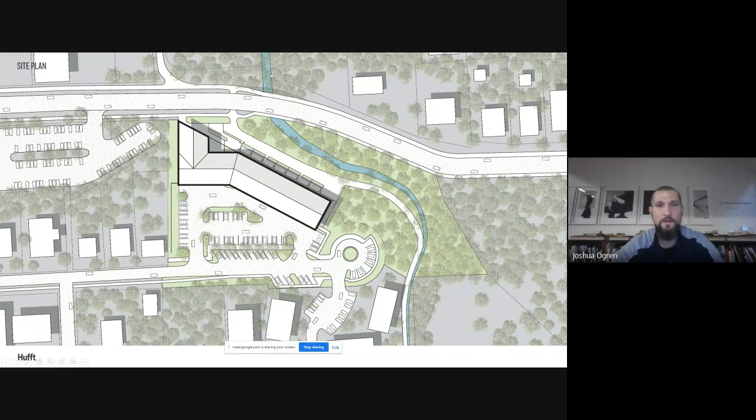So taking our full canvas, mapping some gears on it, dividing those into strips and regions, and starting to get these varied lengths, dimensions and depths with a bunch of wood units that we had to start thinking about - okay, how do we piece this together in our fab shop, and then be able to send it to site in pieces, but for a clean install.

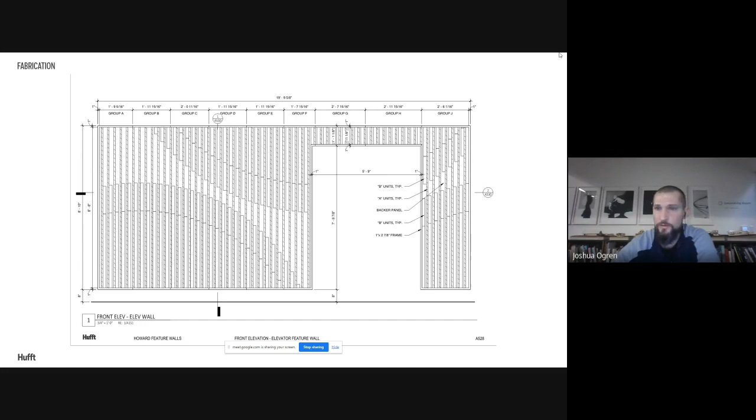Additionally, this allowed our fabricators to easily take a ton of pieces and place them where they needed to go without thinking too hard. So what you're seeing on the back is straight out of the parametric script, programmed to help locate where a bunch of holes would go, essentially to receive the wood units. It looks chaotic, but there's actually an order to all these holes if you look closer, following the gear mapping design on the front.

And then a quick little detail view before I get into images, but something that helped our fabricators guide their process of attaching all these singular units was taking our smaller units and routing a notch into our back panels. Those really led the way for somebody to place a bunch of repetitive units first, and then all of our unique units directly next to those as they worked left to right.

Again, pretty helpful parametric design, allowing us to cleanly and orderly output a bunch of stuff for direct geometry to our CNC router that we have in-house, and keeping those in order for our next step of somebody putting all these pieces together.

So the architects just had this basic idea of this bottom left profile of a long piece of wood, ash. He came to us with one profile that he wanted to repeat essentially along this full canvas, but we thought, no, that's too easy. We could make this a little more exciting.

So we started thinking about how we could slightly manipulate the profile he gave us, really just in height, and then how we would start to arrange these units to fill our nearly 20-foot tall canvas on this wall that we had to fill.

I don't believe there's anything truly random in the world. Even if it looks chaotic, there should be an order to it. So we tried to give order to this random arrangement of essentially wood sticks along this wall.

But what we found was this mathematical term called permutations, which was one way, or one of several ways, to create variation, where one set of numbers can really be transformed to reach your goal.

And we found that just using 3 different lengths, you can see on the left, we would repeat the blue C length twice to reach our full height. But then how could we script something to help us study the random arrangement, while trying to find a goal within that randomness?

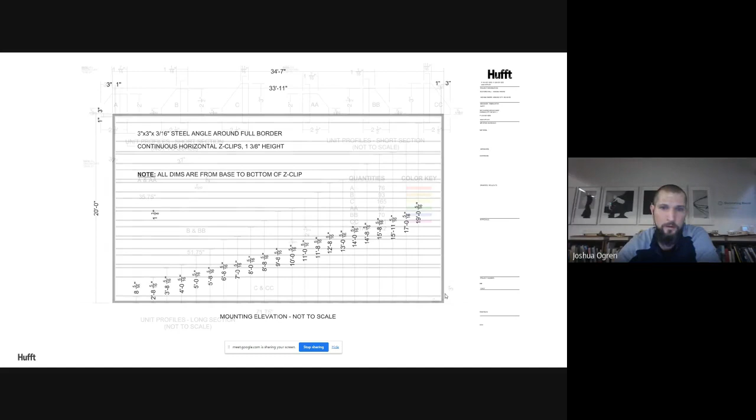So again, using parametric design to quickly output construction documents as they change slightly once you get into fabrication has been super beneficial for our shop. Just another quick drawing of the different profiles, and again, parametric design allowing us to quickly understand how many quantities of each different unit needed to be produced.

So our shop could quickly cut down to scale from ash wood sticks, 76 for A, and then shape them up. So it was a pretty efficient kind of production line we created for it.

This was the final design and kind of a key to help, once we fabricated all these pieces, where each piece would actually go on the wall. Quick detail just showing those back clips that would be attached to each unit, but once they were shipped on site, the construction crew really just had to follow our key and just place these on the wall. There was already somewhere to receive each one.

So we used ash wood for this. It was a slightly lower cost wood, but gave us a nice more white sheen to these, and you can still see grain, which is a nice texture to add to the wall. But again, just almost like Santa's workshop, just pumping out a bunch of similar units. You can see these all stacked before we sent them to finishing.

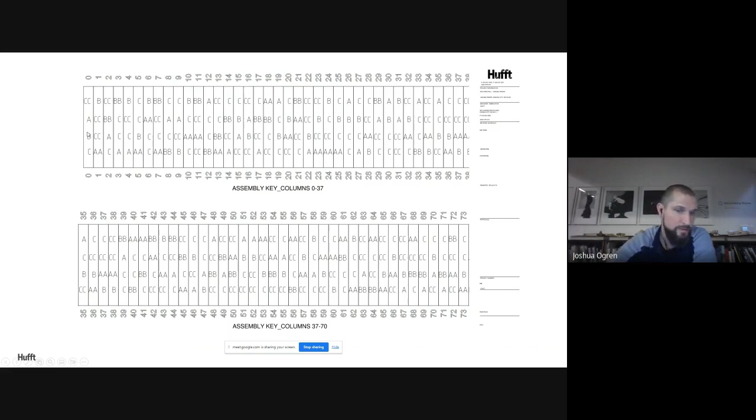And then once they were finished, we shipped them all inside to crates. And although this isn't a pretty drawing, again, parametric design allowing us to quickly produce and output a key so that for each row of these sticks, all the construction crew had to do was go grab that unit and place it on the wall, which was already received by Z clips that were placed correctly.

Next one is a more internal project we did at our office. This was fairly early on when I got hired, and I was the first employee with parametric skills that we could apply. So it did take me a minute to get them to trust the process, and especially with fabrication, the efficiencies that we could do. So this was a nice test for that.

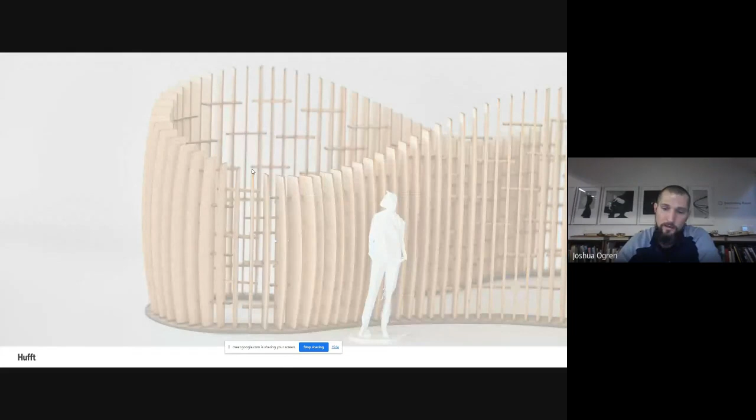So in our office, we had a pretty big empty space, and we're in an old warehouse that we've renovated with the fab shop in it as well, but there's just not a lot of private areas to go to. So thinking of how we could utilize this open space, we had this idea that it would create this kind of mixing of people and energy. And it really brought us to this idea of a nebula, which is the name of it. A nebula is essentially a star that has collapsed on itself and then explodes and creates many more particles around that start to interact with each other, creating a new kind of energy. So conceptually, that formal look at what a nebula is kind of drove what we wanted to do.

These were pretty early pics, but it's evolved a lot since then. We'll see another picture later, but what also made us think of nebula was we had this large sphere that was designed essentially to help plants grow inside. We had that kind of left over from an old project - we might as well use that to be a kind of focal point.

Just going through the kind of process that we went through to see what kind of form we wanted, and measuring kind of material that we could use and afford, since this was an internal project.

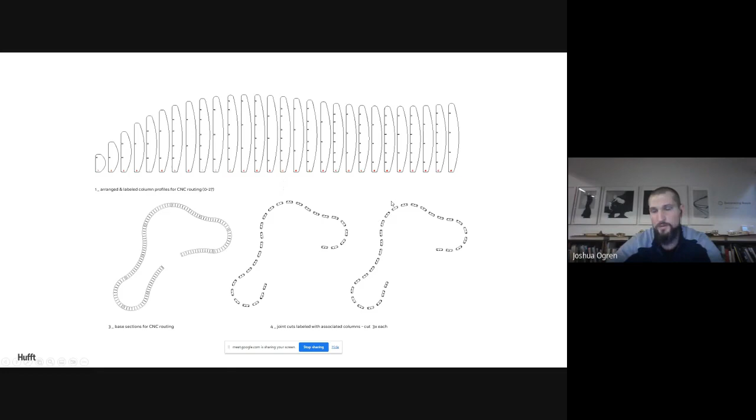On the bottom, this kind of gets to that joint repetition. Although we had maybe 200 joints, we really only had a single, much less cut patterns for each that just needed to be cut 3 times.

So just getting into that kind of fabrication, we did a mock-up of this again to just kind of prove and get everyone comfortable with the whole process that we're trying to implement.

So the mock-up was on our left. We didn't end up using it because we decided to change the top profile of these to be more rounded, just gives it that softer feel. But it went super smoothly. There's no nails in this. It's a freestanding structure with just intersecting wood joints.

Here you can just see the detail of the labeling of all the columns, and then any joint that needed to be attached was also labeled associated to the columns, so they weren't like different numbers or A, B, C with numerical designations.

I should have gotten some final, more recent pictures, but we had tried infilling it to make it a little more private with some small acoustical panels. But now those are gone, and we've infilled this with tons of plants, which really is driven from that grow light being in the center.

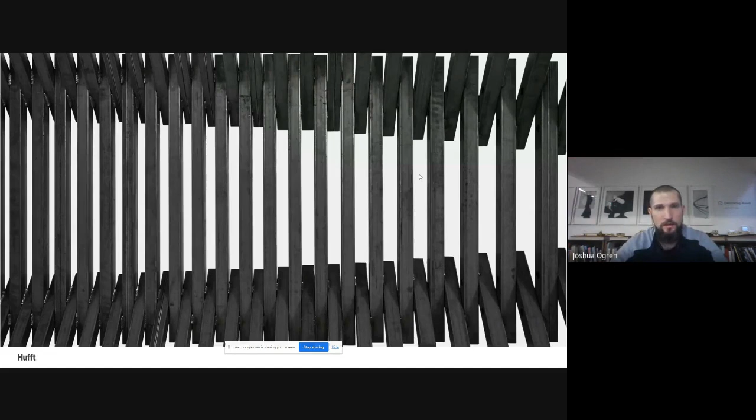Next project, I think we're doing okay on time. Next project were these structures standing out in a National Park in Arkansas called Hobbs State Park.

So we were tasked with 2 different kinds of projects. The one we're looking at here were trailheads for the mountain biking system at the main center of the Hobbs State Park. They wanted these just large structures to kind of welcome people and allow gathering areas before maybe a group of bikers would take off.

There's also, we'll see them in some pictures, some campsite structures that you could hike into. You can't drive to them, you'd have to hike in. So it provides just a nice little element for your evening camping.

But really just showing the breaking down of geometry. It's fairly quick, but honestly pretty simple.

When I started with the project, somebody had designed these on kind of an ellipse rather than a true sphere, which we found pretty problematic for some of the intersections we were looking to get. So we had to take quite a few steps back, apply it to two spheres, and work from there and see what we could come up with.

Again, quick diagrams showing the process of a parametric script, breaking things down and keeping things ordered with each row, knowing that if we're going to have maybe 600 pieces of steel tube that need to be different lengths and different hole intersections, how do we keep them ordered? I really don't know how somebody would do this without scripting and having it parametrically driven.

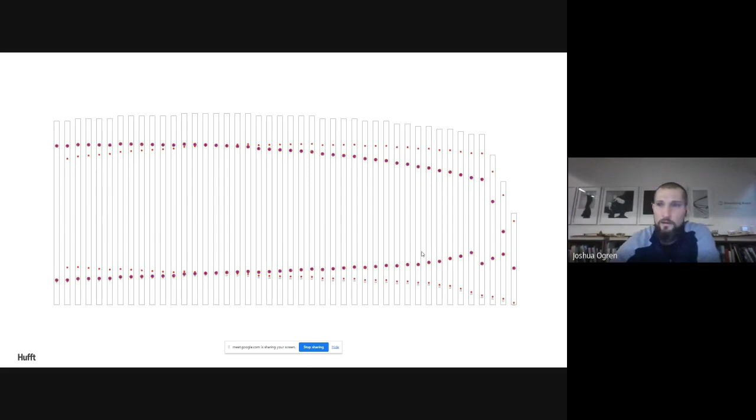So this machine really just took a very long 2x2 steel tube, cut it to its length, rotated that to put the top and bottom holes on it, and then spit it out and just kept going to the next one. So we found a pretty efficient process, because I don't think anybody would want to do this by hand.

So then showing kind of the organization for our fabrication drawings. Once all the things were cut to length, how are we going to build this?

We really knew we needed to build this in pieces in our shop before sending to the site in Arkansas, which is about 6 hours away from us. So doing this in pieces that they could just easily put in place with a forklift.

Again, all those laid out. This is essentially the file we sent to the company that cut the beams.

So some in-process pictures. It was a crazy amount of material, but everything was labeled and cleanly organized. So in our shop, we could easily stack these up and flex this into place.

Although we learned, and I love doing the structural analysis of things, it's been hard for me to implement that kind of element into what we do here. But this was signed off by a structural engineer, so I didn't have to worry too much. Just had to trust that the process of everything coming together correctly, and it worked out.

One detail was thinking we had to come in and think how we were going to finish the edge of all these beams. Every beam needed to sit on itself, so the beams that terminated at the ends really needed these smaller portions. And since these were kind of on a spherical shape, as they moved up, they needed to turn relative to that circle. And that angle is actually very hard to really tell somebody what it was.

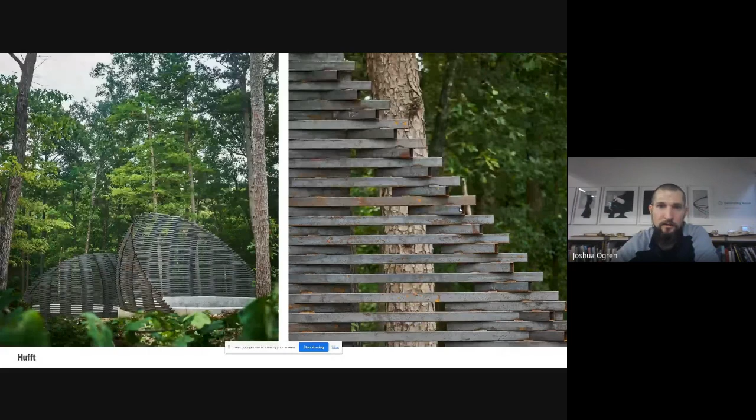We chose not to finish the steel so it could rust and get this nice color, matching and naturally blending with the environment as much as possible. Kind of keeping a more raw element to it.

This is the smaller campsite structure. What I've shown so far is mainly those large trailheads for the mountain biking trail, about 24 feet wide by 16 to 18 feet tall. These campsite structures were much smaller. We actually did them first to make sure the full process worked before getting too far into the big ones.

Just a couple of details - the finished product. When you get below it, you can start to see it. We wanted to hide holes as much as possible, but it was difficult doing that, just knowing how it needed to go together. So when they put these together, they would always have a larger hole on the bottom that allowed them to get a tool in their hand to tighten all the pieces they needed.

That's one of them sitting at a campsite. It's a perfect dimension for you to also hang your hammock across the front if you wanted. And then again, we went back a while later to see the evolution of rust and aging of this in its natural place.

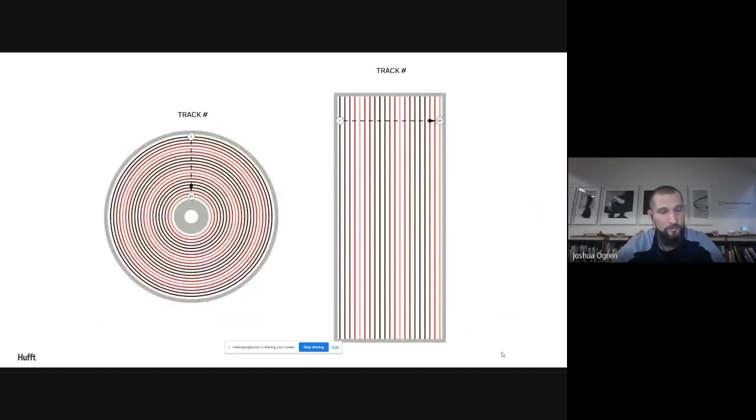So the building was based off a concept of reverb, which is sound, and we took that into consideration for what we wanted to carve. There was on Voyager 1 a golden record sent out into space that contained 21 tracks of Earth life, nature and human life. So essentially we took and recorded those 21 tracks and wanted to map them onto a canvas. After recording them, we would get the sound waves and be able to manipulate that into making our artwork. Each track was a different length, and as we ordered them on the canvas, it would give different effects.

Just studying that and mapping it into our constraint of thickness of wood. We studied a lot of different ways we wanted to produce this texture, and ended on getting into actually carving it with a CNC router, choosing a bit that represented what a record would be played on, a triangular bit.

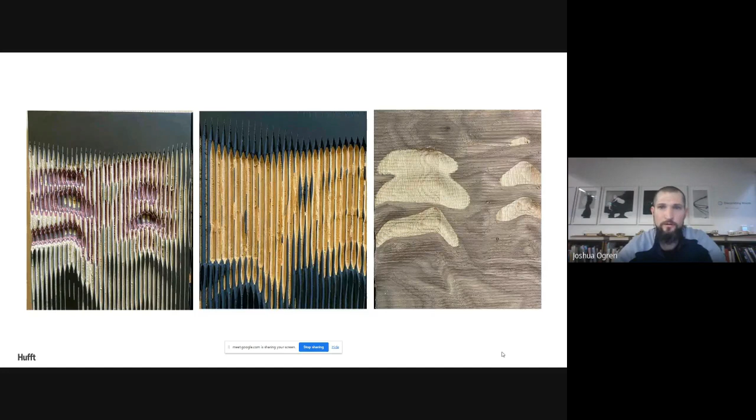So as we mapped it in and started blending more and more curves between them all, we came out with this nice textured finish that represented all these tracks blending together. We were able to study the different types of wood or material we wanted to use, and ended on these different studies.

We also used reclaimed wood, 21 pieces to represent 21 tracks, to get the final piece. It came out with some nice texture and movement across the whole thing. That's it for me.

Thank you very much, Josh, really impressive, very artistic playground you have. A lot of space, and it looks like the office you are - it looks nice, very, very nice, no? The ambient, the feedback with the workshop - it's very nice to have that. Yeah, it's pretty rare collaboration, so it's fortunate to find it and be in the hometown as well.

And how much of your time do you spend strictly on parametric stuff? I want to say about half the time now. Is it increasing? Definitely increasing. There's always those lulls of time, but we implement it a lot.

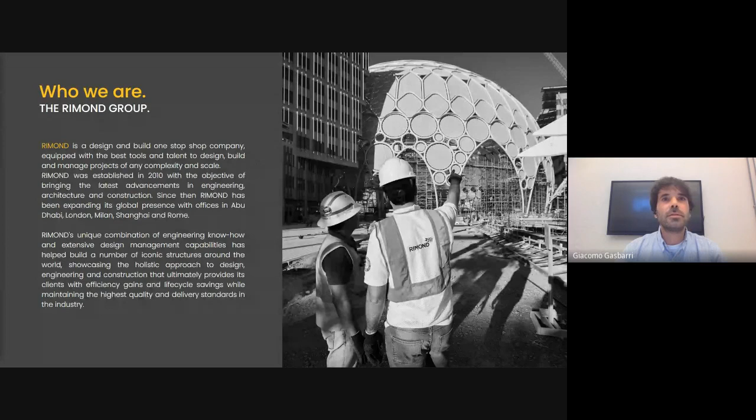One of the very first projects where I was involved, when I came here, was a dome of Al Wasl Plaza in Dubai for Expo 2020. This is a very interesting project, because in this project we touched a lot of topics that we saw in our master, like finding minimal surfaces, structural optimization, digital fabrication. It's a lot of stuff.

This is, I don't know if anyone knows this project - I think so, but this is the dome.

Here we have some numbers about the dimensions: 130 meters of diameter, height about 67.5 meters, and something around 14 kilometers of steel beam.

In this project, the workflow of information was very important. We have a lot of data coming in and a lot of data that we have to send out to the construction team and to the designers.

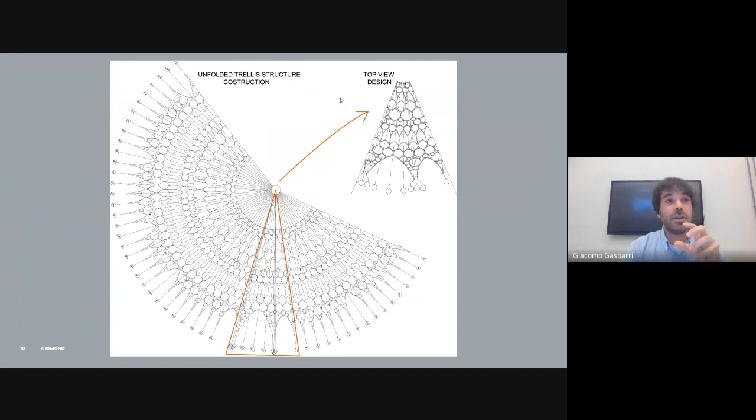That is this, the profile. We remapped all the 2D dimension information into this 3D model, and then unfolded the entire geometry into 2D dimensions in order to be able to speak with the construction team and the designer, and bring each item of the dome into the exact 3D position in space.

The dome is obviously not a perfect sphere, it's a little bit more complex than a sphere, and that brings more complexity to the geometry.

This is an example of what kind of information we had to extrapolate from this 3D model, like structural information, installation devices, all from Grasshopper.

So when we had to produce the construction documentation, we saw a lot of this kind of problem.

How did you solve it? Are you going to show? I will show you in this way.

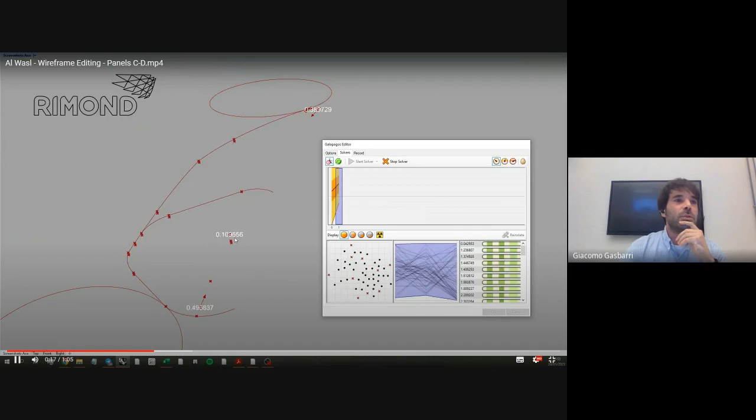We ran a little script, a short and simple script, that basically kept each contact node tangent, and tried to fit the panel with the minimum angle deviation from planarity.

All this stuff is basically for the pre-construction process. Our main focus was the workflow of information between our model and the construction team and designer team, because a clear and simple workflow of information translates into time and cost savings during construction.

So all that we did in this project was basically reconstruct the entire structure in order to avoid this kind of problem in the construction phases.

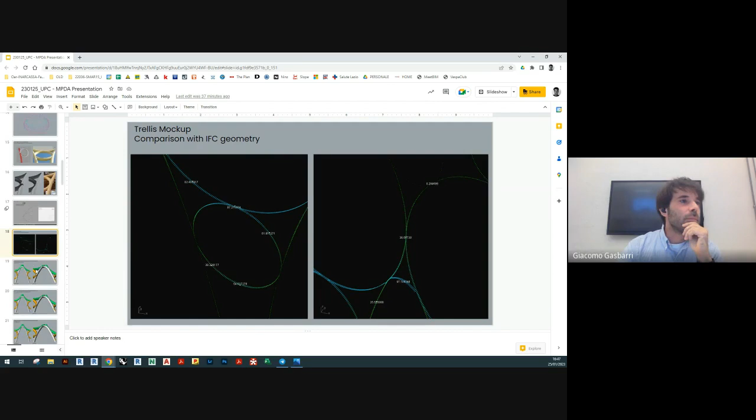This is an example for a typical arch: the first geometry, and how we solved it, maintaining each point of contact with each panel tangent.

And we worked with a very minimum error. We had something like 1 millimeter of tolerance, 1 to 2 millimeters of tolerance.

For example, apart from the big structures, we have items like this CCTV camera, a security camera.

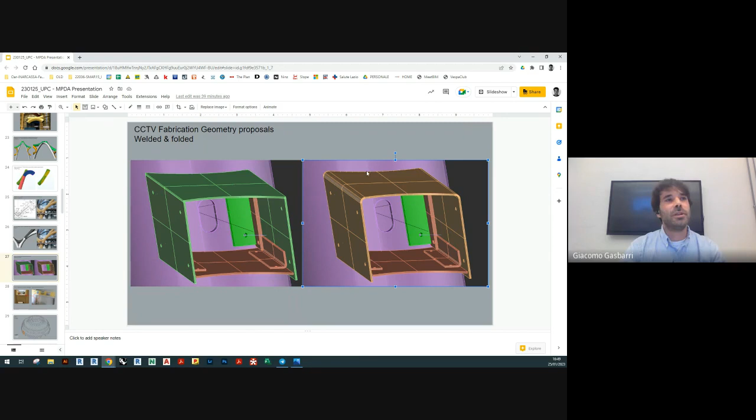What we did was take into consideration the deformation of the steel to build this item. We had to consider the welded proposal and the folded one, in order to avoid this kind of clashes.

After our optimization, the result is this. The white panels are the unchanged ones, and the black ones are the modified ones. This is because, for example, the white ones are the only ones with one curvature. I mean, it's a ring composed by several rings, but with only one curvature in the horizontal plane, with the center in the same axis, the same plane, horizontal plane.

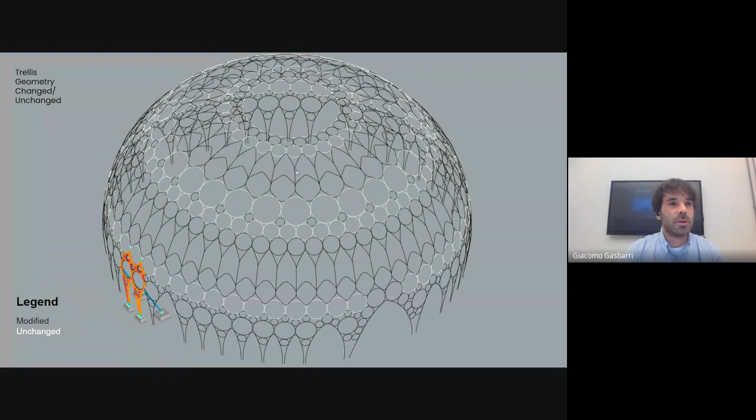And the black ones are the double curvature ones. For example, this one at the top of the dome was the animated one. Do you remember?

Also, we have to deal with minimal surface. I mean, in each panel, each ring, there is a membrane, an elastic membrane, that is not mounted in a plain ring. It's obviously mounted in a double curved ring.

So what we did also here was to find a wireframe for the membrane, and then run a script like Kangaroo to obtain the minimal surface of this ring, that it had to be. I lost one slide.

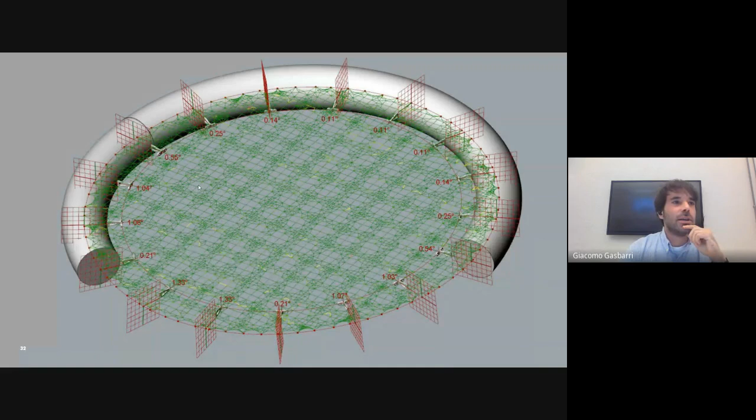Basically, in a project like this, we have a lot of, how do you say, limits, restrictions. We worked with minimum tolerance. In this case, for example, this ring where the minimum surface of the membrane is fixed is not planar, like I said.

Basically this is a three-arch with, how do you say, kinky node? Yes, perfect, that had to be less than 3 degrees. I mean, this ring is composed by 3 arches that have a kinked joint with a maximum of 3 degrees of tolerance.

About what I was saying before, the workflow is very important in order to save time and money during construction phases, with a complex construction process, a pre-construction process, where digitally we can see what we are doing basically.

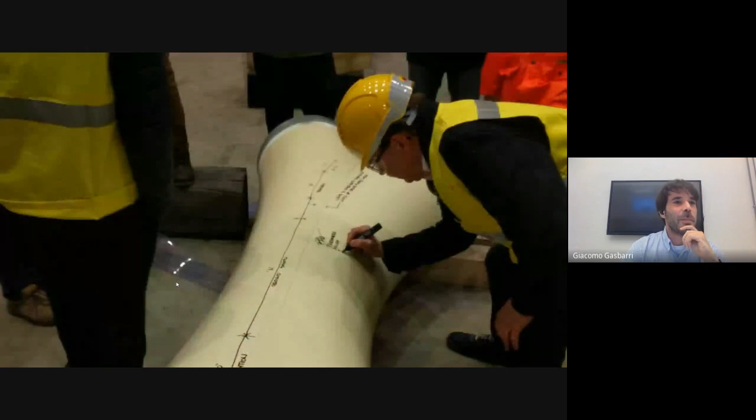This is some... I don't know if I can show you these images, but I don't care. It's very interesting how they construct all this, how it is identical to what we did in Grasshopper.

Obviously, all the process, design and construction, was focused also on this topic. I mean, transportation, modularity and transportation for Dubai, because all this was built in Italy.

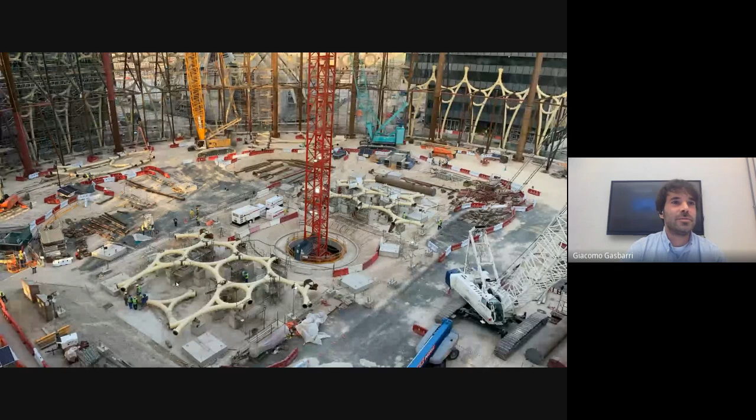Another fun fact is, during the, how do you say, during the lifting, the elevation of the last ring, one of these hydraulic jacks was broken. So the team in Dubai had to run a little simulation, a short simulation with Karamba to redistribute the hydraulic jacks to lift the last ring.

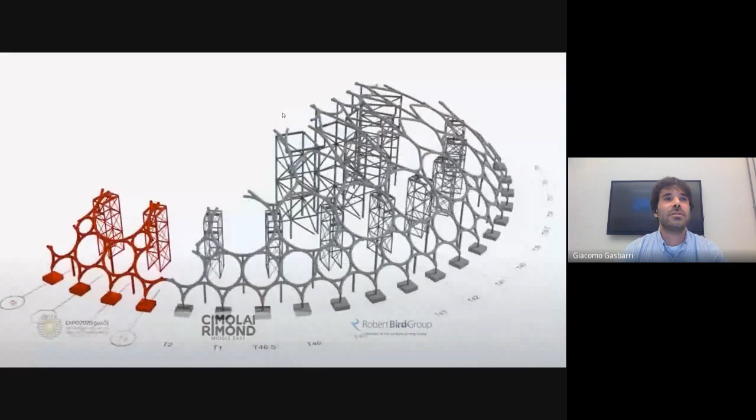I mean, one second, the last one. Grasshopper was used also to do this kind of stuff. I mean, 4D, 5D. We used the model with Grasshopper for each phase.

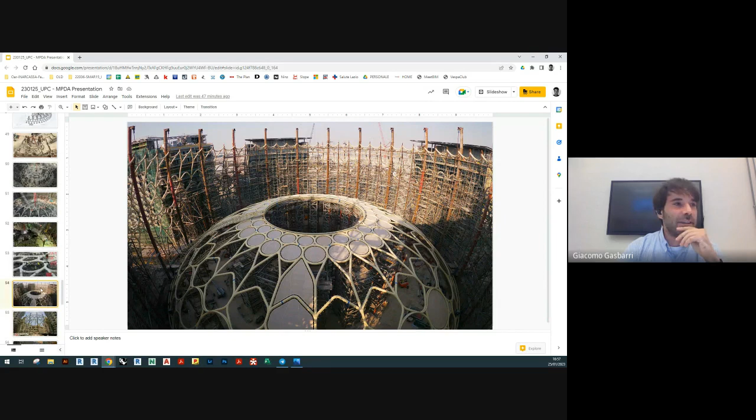And this is a project where we only... I mean, we didn't design the dome. This is the last ring, where they had to redistribute this element in order to lift it, and they did it with Karamba to find the right position. And the final result is this.

Another short project I want to show you is one where we did the design and construction in all the phases. But in this case, Grasshopper was used only for the facade construction, because whoever designed the facade had no idea how to build it.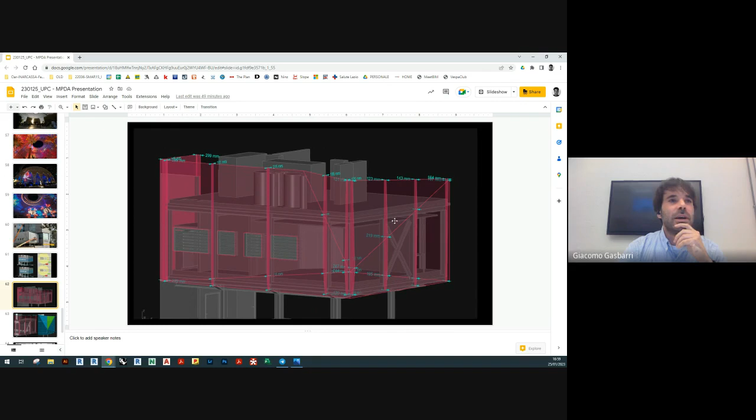So we used Grasshopper as a tool in order to, first of all, define a good pattern of our facade, and second, to take control of this facade, because what we didn't have at that time was control about what we designed. Talking with the constructor, we had, like in the first example, a lot of dimensional limits.

So what we did was basically take control of what we were designing, study the pattern and the, how do you say, la factibilità? Feasibility, exactly. Because in a case like this, the constructor will say to you, I can't build this, it's too difficult, it's impossible, the panel is not planar, the facade is too complex, and you can say no, I will show you it's possible, and I will show you how.

So basically, that's what happened here with this project. We studied and defined all the anchor points at the main structure of the facade, and then communicated with the constructor to build what we wanted, as we wanted.

And that's great. Very good, Giacomo. Thank you. Geometry to help.

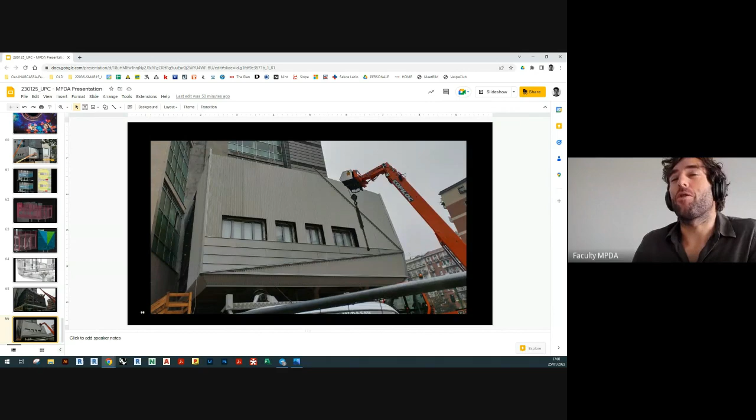Exactly, I am very impressed by the size of your dome. I never had the real scale, I thought it was big but not so large. I mean, like a couple of tons, or maybe 5 tons each piece, how much does every piece weigh? I don't remember, but it's huge, yeah. Consider that this is the thinner part of the dome.

And were you stressed during the assembly? When they were assembling it, it took a long time, no? Stressed? No, no. Very nice, very nice job. Thank you.

I have a lot of material about the dome, we can do a masterclass with Grasshopper and this dome. I'm very happy - Josh was sharing a project where the tool is used as a pure factory of designs and proposals, and here it's more about making it done, the rationalization and making it buildable. So I think it's very nice, and making a lot of custom tools to visualize.

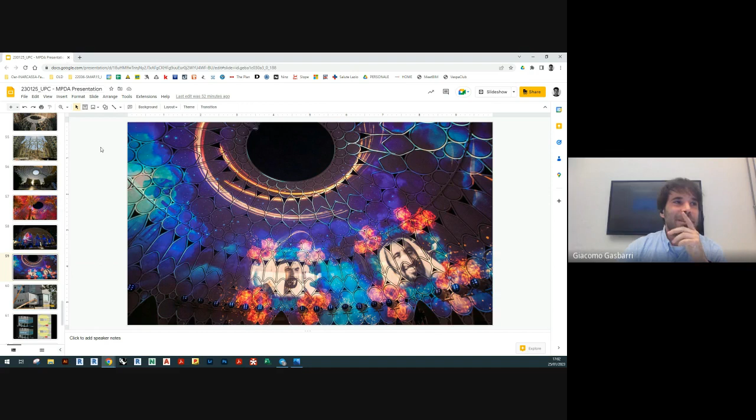In fact, in this dome project, let me show something very quickly. At the beginning there were fewer parts and it was simpler. After our optimization we have more parts with a bit more complexity, but now it's working - the geometry was wrong before.

For example, in this case they wanted a panel with one unique radius, as you can see here - I don't know if you can see. After our optimization, we have 3 different radii, but in this way it's constructible.

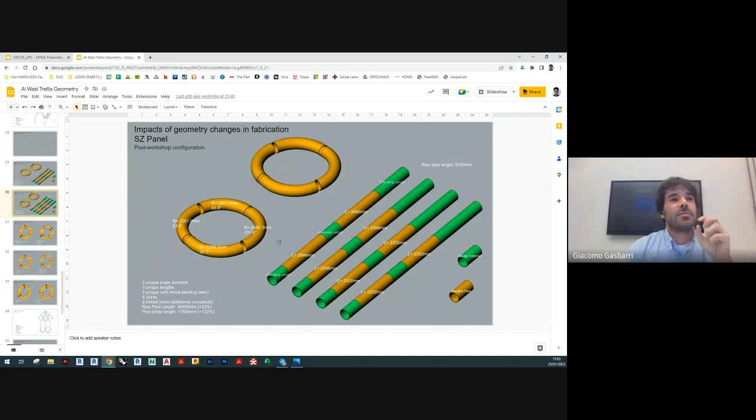So that's it, very nice Giacomo, thank you very much for sharing it. Thank you. Okay, who's next?

Me? Hi, Adrià. Hello, hi, let's try - how are you doing? You are very far away from the camera, you're in a very large room, no? Yes, in one of our conference video call rooms, meeting rooms.

Great, yeah let's try to show. Are you in Olot? Yes. Okay, share it and here. You see the screen and everything? Yes. Very large conference room and very large typography. Yes.

Okay, I will show you 3 projects, well 3.5 maybe. First of all I will present myself - I'm from the master's first edition, 2016-17, and now I work at Bellapart. I am teaching parametric geometry in UPC architecture bachelor, 4th grade, teaching Grasshopper, and I do some 3D models as freelance.

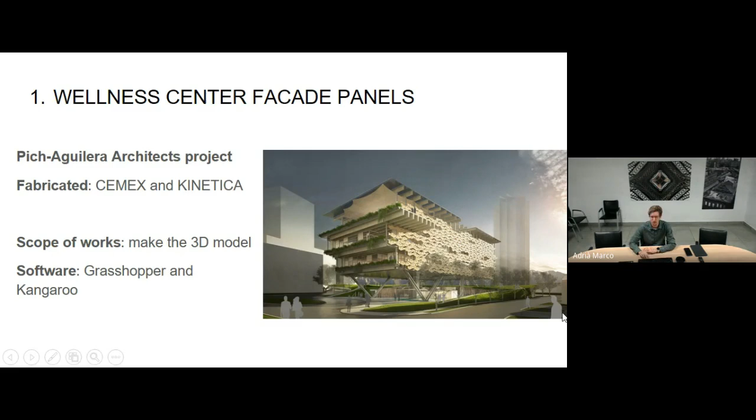I used Grasshopper and Kangaroo - maybe Kangaroo wasn't necessary, I didn't have to, but I just wanted to play somehow, and they paid, so it's fine.

And this was the panel, made of 2 kinds of concrete. The project was to make this concrete panel that has a 3D shape, a part that is like inflated, like simulating dunes, so that when the sun is very high it casts shadow on itself because it's in Mexico, and it gets not as hot as in winter when the sun is low and touches the whole surface of the panel with no shadows. So this panel makes shadows over itself, and that was the idea of the project.

This was the intent design, or what they gave me. As you can see, they couldn't make this 3D shape, and they had a lot of problems. So I had to solve how to build this and how to design this panel to make it so they are able to fabricate it.

This was my input. I couldn't change it, I had to fit into this size, into these measures, and it was just 2 panels that combined in a certain way. You see that random facade.

So with the architect, we agreed to these artistic lines that he liked, and everything over these lines had to be inflated, going outside of the planarity, while what is inside this curve should be planar. As you can see here, these things cast shadow to itself.

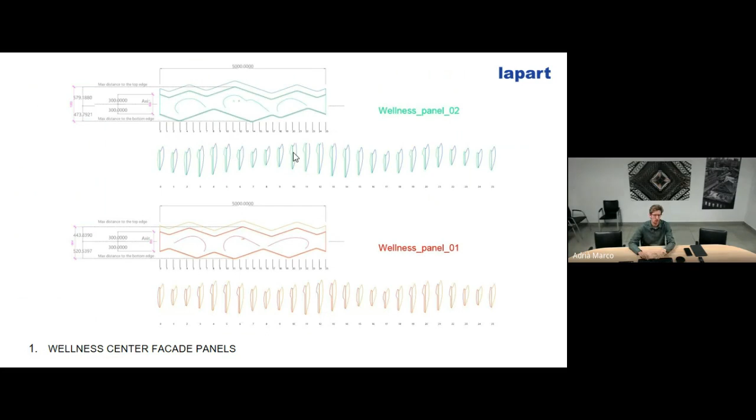After discussing with the architect, we agreed to this curve, and I delivered this and the 3D models, and the geometry points, the center of gravity, so they can calculate all the structure and everything. So it's not just about the design, you have to give them some properties of the pieces so they can work and build it. I will explain how I did it.

It's just with Kangaroo, because it was the thing most similar to the master's work that I did, so I'll explain all the process. I had these two panels, and I made these zones that are the planar ones, and the not planar, this outside zone.

How did I do it? With Kangaroo, I took all these points, and I made catenaries, so I could draw them here and elevate all the points to make this nice curve with some elevated points.

As we can see here in a zoom, this line was elevated going up at the top of the edge and then going down to cast shadows here.

The point that was at the most distance from the edge of the panel is the point that is higher, so it has to cast more shadow than the one that is nearer, which casts less shadow.

Next step, doing all these strings. The strategy was doing a lot of strings, and then I would pull these strings in this chord, in this edge, to elevate them.

To make it nice, I could not just take them, so I divided the thing into sets of points. The normal strings, all vertical, and this edge string that we saw before had elevated points, and their adjacent points had to be perpendicular to the curve to have a nice effect of convexity or concavity. If not, it doesn't work as well.

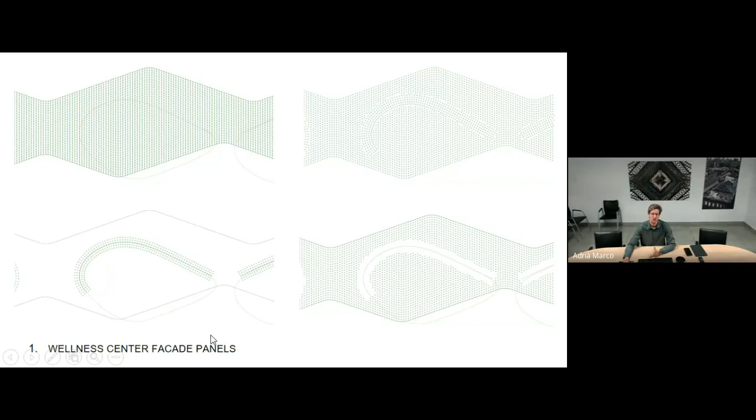I prepared all of this as if it was a funicular shell. That was my final thesis in the master's program, so I just wanted to apply it somewhere, and it worked for this design, so I did it.

So I divided the points with the points that have normal strings and the points with the string that has the curve. I meshed them together, then you make the ordinary mesh, clean it with Grasshopper, and we can see here the mesh in 3D, how these strings on the mesh had this top edge and go down. What comes next?

With Kangaroo, all these points here would have a gravity zone going down, and all these points here will have gravity going up, and as they are nearer to this edge, the gravity force that goes up will be exponentially higher than for points farther from this edge.

All the strings, all the inside edges, will try to have the minimal surface, so it's not loose. So this string will have some strength to keep it planar.

So we have this, and after the Kangaroo simulation, we have to separate the anchors, all the perimeter edges, the curved edge that we want to keep. Then we have these points with gravity going downward, and these other points with gravity going upward.

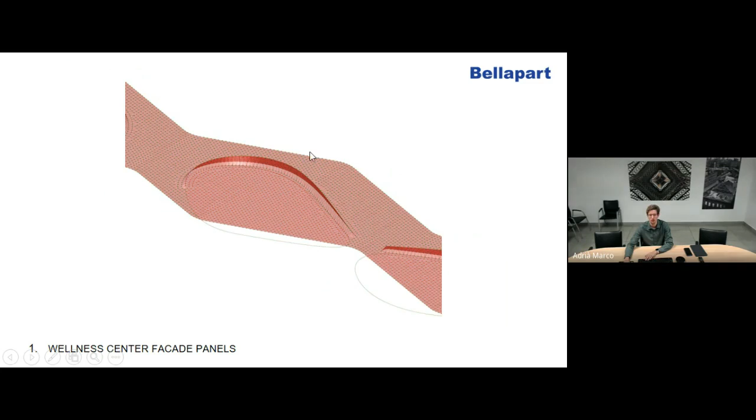So at the end, we have this panel that is inflated here, but here it's flat, or almost flat, and this is concave, and here it's convex. And here's the topography of this panel that casts shadows to itself.

With this, we send it to Kinetica and CEMEX, and they produce the prototype of this panel. They saw some mistakes in the design of their input, so we had to make it thicker, and we had some water problems, so we made adjustments to the design. Thanks to Grasshopper, it was just changing a little bit the inputs, the thickness and everything.

We made all the changes and then had these two models of these two panels. This is the outer face, and the inner face is just a normal surface, not a big deal. So with Kangaroo we could design this nice effect of dunes, very smooth. And here's the composition of the facade.

So the architect could approve it, we made like 6 or 8 versions until he approved. Usually we work with the architects, or I like to work with them, going there making a lot of iterations until they approve. It's nice to work with Grasshopper because you can make a lot of changes every time you go to the meeting and they like or don't like what you're doing.

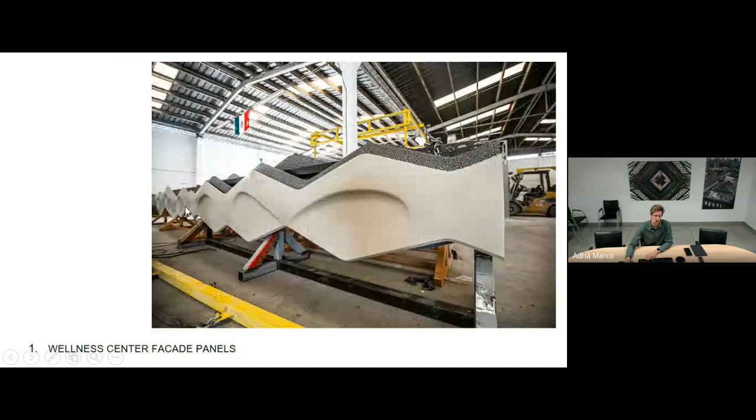Something important I learned in this project: before working, always ask the fabricating company which software they have. I designed everything with Kangaroo, with a mesh, because in the master's program we played with meshes. When I delivered the mesh to them, they said, 'Our program does not work with mesh, we need a solid.' So I had to repeat everything, make a lot of sections, and rebuild it in a format like STEP or IGES, whatever they needed, because it could not be a mesh, it had to be a BREP so they could work with it.

So now I always ask that before working, like what software will you open it with? Okay, then we can work with it. So this would be the first project that I did myself, just these panels.

This one is done in Bellapart. What I do there is I'm in the estimating team, so I price the projects, study them, and check how they should be built, and make the offers. When we win, the design engineers and manufacturers in our workshop will build them. Until there's a project with complex geometry or 3D models, then I go to that team and work with them. So I just have 3, or 2.5 projects I can show, and they are very focused on construction, how to detail and how to construct it.

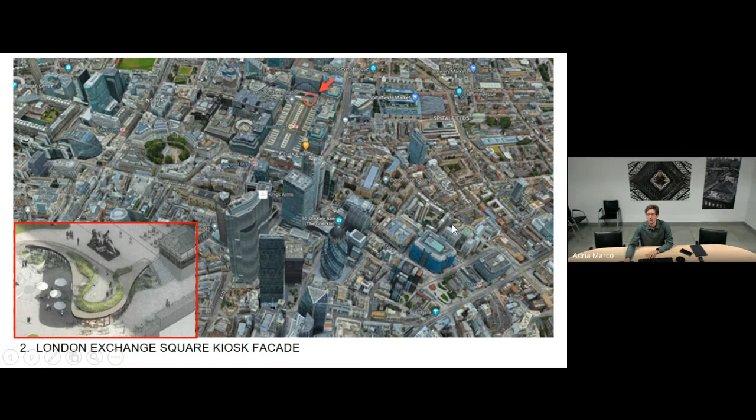So this facade is here in London, very near an important place, an important extension. We had this curve, which is the render from the architect, he loved this curve.

You can see here all this black part is our scope, the part that we did from the project. What happened is they didn't do any 3D model, even though it had this curve facade changing heights, so without working with 3D it was impossible to do anything or for them to understand what they were doing. So our inputs were the structure done by Arup and some 2D drawings, and from these drawings we had to make all these panels.

My job was to make all these pink panels here, the metal panels, and create geometry that could be buildable. Here was the input I had to work with, somehow using these 2 points, knowing their height, figuring out how this model should be, because they just gave us the numerical inputs and the curve.

Actually, this curve was wrong because the panels between them were not tangent to each other, so it could not be buildable. And these theoretically perpendicular fins were not perpendicular to the curve, so you could not build the glass with the mullion being perpendicular to the curve. So my first job was to change this curve to one that could be built.

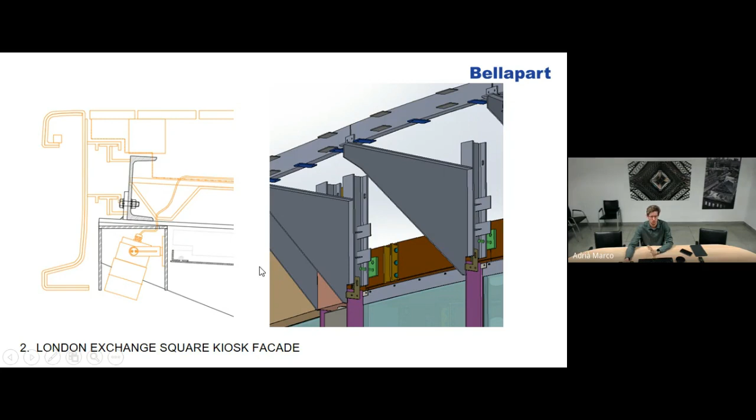Here is the input, and we had to correct all these curves to make them tangent to each other, and discuss with the architect, because his curve was so nice he didn't want to change anything. We agreed to change it by less than 6 millimeters, and he almost cried in the meeting because he didn't want to change the 6 millimeters of this curve.

So we changed it and regularized it, and put all the fins perpendicular to the facade so it could be buildable. That was my job. Here it is made again. No one could see the difference, so it was okay. And now all of them are perpendicular, and we could build it.

What we did, with this input in a 2D drawing and heights, we could do this. I made this surface model just so everyone would know where things should be, what their axis should be, and the exterior surface of their elements.

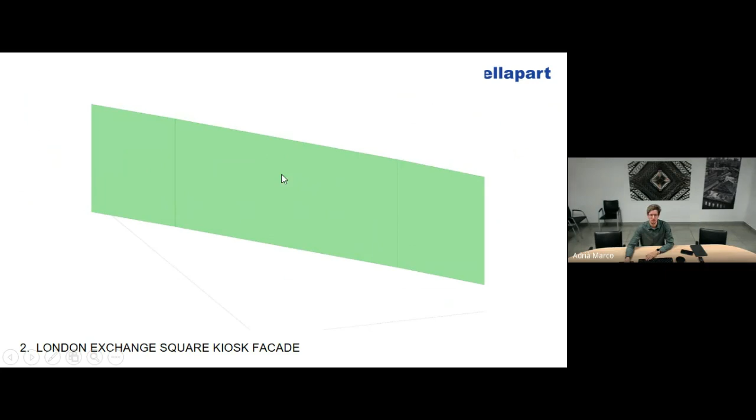You can see here, this was my input: take one panel and create these elements. You'll see later the joints between them, and how to hang these panels, making this tolerance space between them.

Here's the whole panel with all the structure, and this is it—a 3D model of the panel and all the superstructure behind it.

What was good with Grasshopper is I could input all these panels at once, and just by working with one of them—there were 39 panels—in just one day we could have all the panels ready to be sent to our supplier.

Here would be the model, and this upper part too. We had two options, so Grasshopper could decide if a solution fit or didn't fit in the space—option A or option B. So it was really easy and fast to do.

It was not easy to prepare the first one, but then it was easy to adapt and prepare 40 of them, making them pretty fast instead of one by one.

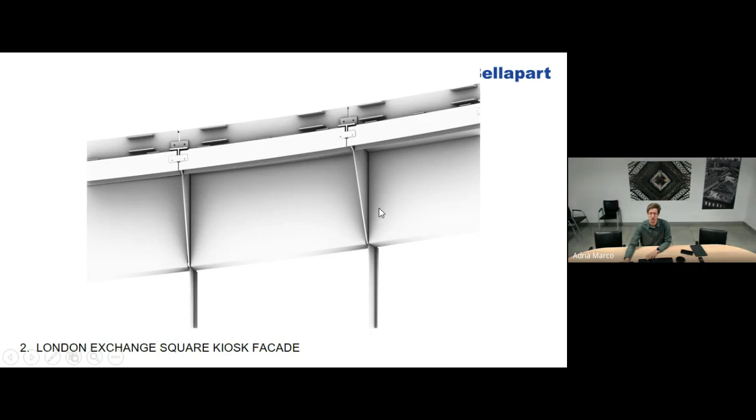Here with Grasshopper we could check for collisions with other parts of the structure. For example, we could check collisions and tell it to prepare spaces here to subtract all geometry so everything could fit perfectly with the other parts.

Here is what we sent to the supplier, and here you can see one of the platforms, this one green, with how everything is labeled. So it's very constructive how to make all this superstructure to hold these panels really quickly and with a systematic approach.

Right, and this is another kind of panel where I had to do this pattern of holes adapted to all of the different dimensions of the panels.

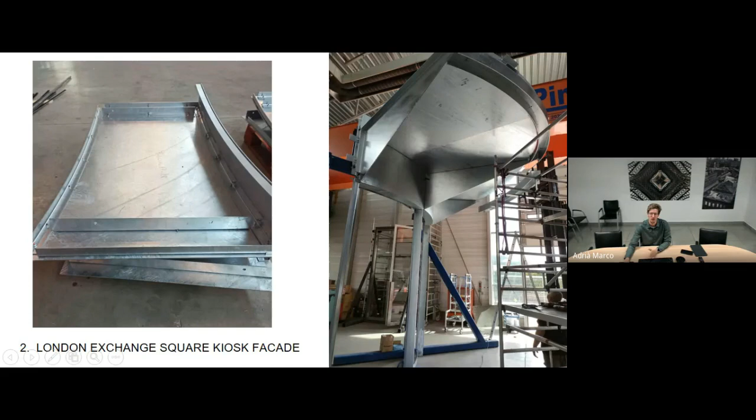And here is how we are in our workshop, preparing the panels and assembling them before going to site. Here is the panel assembled, and here is a prototype that we did to check everything and make all the changes we needed.

And here they are painting the structure with a new technique, making it black like ash. And here are some installation pictures.

This is what we received. We go with the topographer, make the survey, prepare everything, and check that everything is fine, because every piece is designed at the millimeter, so we have to verify that once installed, it's according to our 3D drawing.

I had to verify every piece, every element with Grasshopper. It's really easy to make topography and survey verification, so it's really, really useful for that too.

Here we can see the panels once installed and before installation, and here all the substructure already in place. Here they install the panels, some already installed between, and everything fit nicely. It was really surprising that everything fit with that geometry.

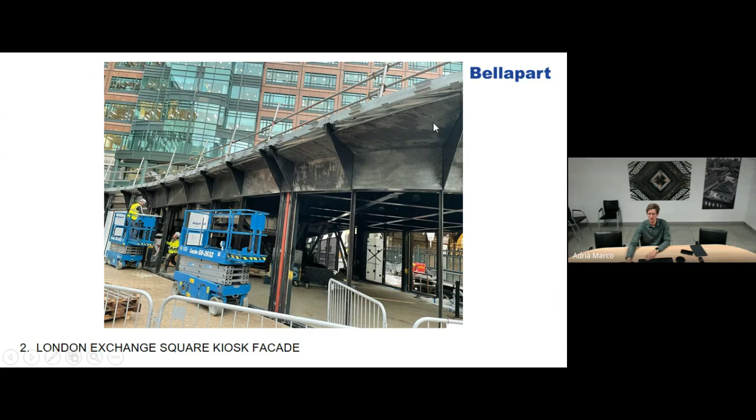Here are some images of everything fitting, and how they made these panels with the holes. And here, the final project.

Okay, this other project is in Barcelona. It's a skylight. I used Rhino, Grasshopper, SolidWorks to coordinate with the other members of the team, Cloud Compare, and SolidCam.

Because here I did the nodes, with a 5-axis machine, which I'll show later. It's here in Barcelona, in the MUHBA, the Museum of History of Barcelona.

We had this input, I think made in SketchUp, and it was useless, very bad, and the axis... but we had it like, here's your project.

In one week you should be buying the materials and start producing, because they already had the party, the finished party, in November. We started in July, and it was like, it has to be done for that day. It's the party, so next week I start building.

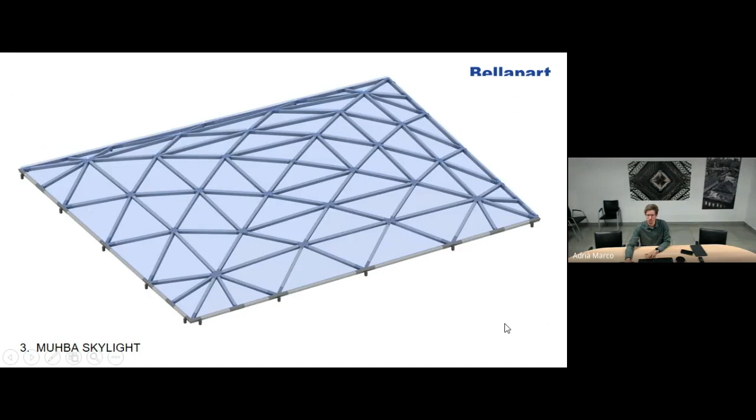Something else that we did here was with Galapagos. I ran an optimization, because they did it with conceptual design, like this square, but they didn't take any topography of the zone.

So when we had a point cloud of a 3D survey, I had to determine where this skylight should be, optimized to have the same or the most regular space between the skylight and the actual real wall of this historical building. So with Galapagos, we ran an optimization to check the angle we should put this skylight at, to fit the best for the gutter, to have a gutter here.

And here you have the real wall in a point cloud, showing how this was more or less inside the theoretical hole. It fits nicely, and we knew exactly all the measures everywhere for the skylight. Here is the gutter I was talking about, with this distance, everything fitted.

And here's the detail I mentioned before: this should be symmetrical, so every bar had to be perpendicular, or had its axis on the bisector, with the same angle on each side of the panel.

So if the panels were not regularized, and nobody with a little 3D knowledge did it, this is what happened: every panel had its own angles and normals. So, well, it was chaotic, and every bar had its unique axis slope.

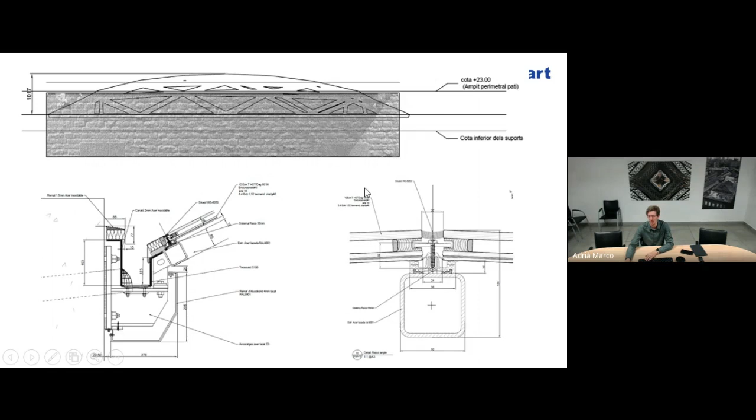Here are all the slopes of the glasses and a quick analysis with Grasshopper. It's really easy to do this kind of geometrical analysis, and you can see everything is different. I don't know why. You could guess or expect that every angle would be the same, because it's like a sphere, convex, a skylight should be convex. But no, somehow one of them was concave, which made no sense, but they didn't allow us to correct it, so I had to play with that.

And you can see the perimeter bars, that every bar had its own slope too, which was very fun, because not even these edges had the same slope, which was difficult for machining the nodes.

There is one node coming from Grasshopper with all these holes. Here we had another hole, and this in red is the stock we would buy of steel before machining. Here it's in SolidCAM. We then use RhinoCAM, and we have SolidCAM to do the machining.

Here we see all our tools. Here's another kind of node with its original stock, and all of this will come out with the milling machine. So it's a solid block? Yeah, all of this is a solid block. The joint is not hollow.

The joint is not hollow, it's solid. Inside it's solid, we just have this small hole here so we can weld it. Because if it's solid at the adjacent faces, you cannot weld it to the bars, since the bars are not solid.

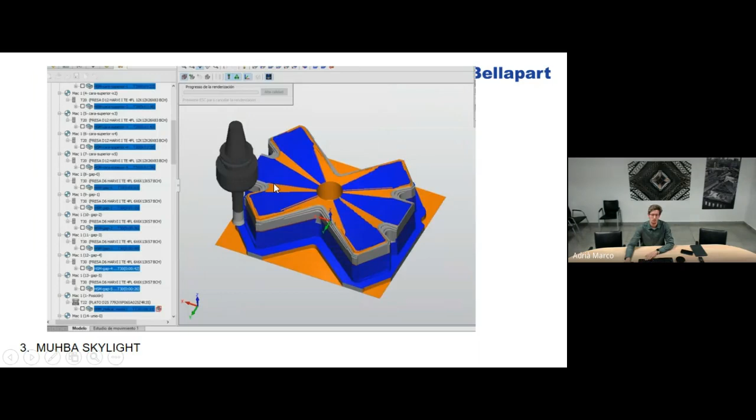So after this, we did a simulation of the milling machine. Here you see how it would start taking material out of the machine, and here are all the operations of the 5-axis milling machine. And here is the final simulation, with the name of this node, face B and C, because it's a corner, number 4.

And here is the node inside the machine after it finished milling. And here is the name, A1. This is the A1 node, and as you can see, it's solid.

There's something inside, but for some nodes we do a hole that goes through all the node, and has another hole in the middle to put some cables inside the structure. As you can see here, you have these holes, and the cable goes inside, crossing all the structure.

And when we installed it, it had 2 millimeters of error in one diagonal, and you cannot see the nodes. The finishing is amazing. Oh, you can see here the tubes. Well, doing this, you can see that everything fits perfect, and you cannot see it. Here's the paint, but you could not see the joints in the welding parts.

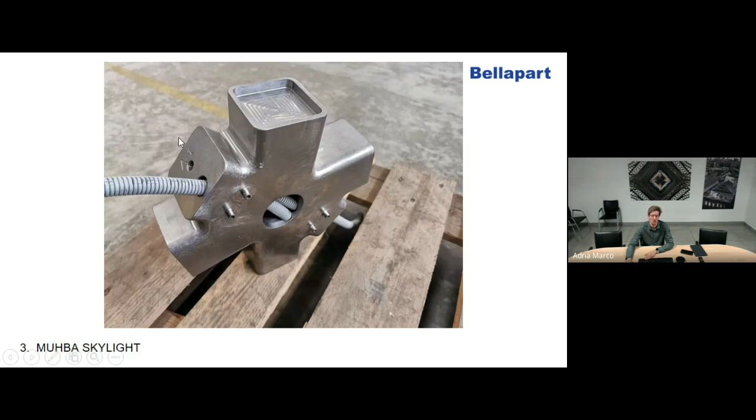So there are some welding parts. This is why these two are so long, and this one is so short, because it's screwed, and we then use the welding machine so we could weld here and weld everywhere. As you see here, this can be welded, this cannot be welded unless the node is like this, and that is way more expensive, like 8 times.

Here you can see all in our workshop, with all these templates that were made with Grasshopper to check the height of everything and make the templates to prepare the structure. Here is the structure, how we were preparing it. Here is me checking the node, that everything fits fine with the templates.

And here you can more or less see how the bar goes changing its slope, and it's the node that had a ruled surface from end to end to absorb this torsion between bars, so every bar could have the perfect slope with the glass.

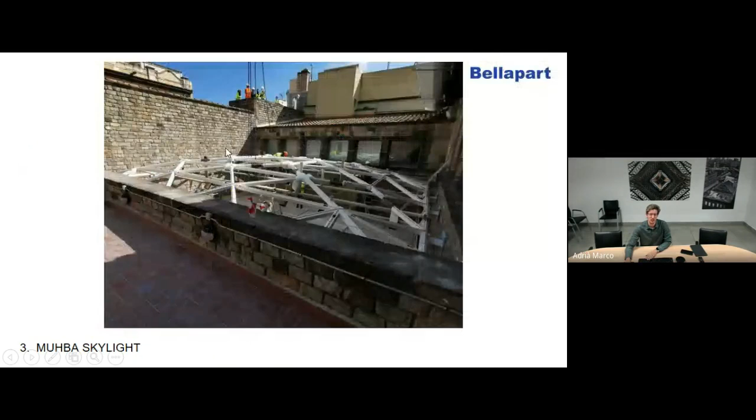That was the difficult part, to make all these nodes fit the perfect plane of every triangle. Here it's already divided into 3 parts at the end, and we fit it here. It's in the hole, everybody fits perfect, everything.

Here is the node that you can see a little bit, but here you see nothing. So it's expensive, yes, but it looks perfect. You can see some structures made in Germany or somewhere else, and it's horrible, the nodes. Here it's perfect nodes that you see. They wanted to see nothing, so you could not identify the nodes. So we said, okay, machining and welding as much as we can. And from the bottom, you can see nothing.

See, this is the final result. It's here, and it's this one. No, you can see it here. And here it's from outside, how it looks. And I don't know how I am with time.

I have one more project, more or less. It's classified. I have to ask if it's classified, yeah, you have to show it. What? If it's classified, you have to show it very quickly. I can show it quickly. We like secret things. Yeah, it's just a specific part, so you cannot see the whole project.

When it's finished, it would be nice to make a presentation, but now just a few points. And if you could, you are recording it. If you publish the recording somewhere, cut this part, it will be fine. Okay, promise. But I want to show it, and it's very cool. Okay, it's classified. I cannot say the name of the project and not where it is.

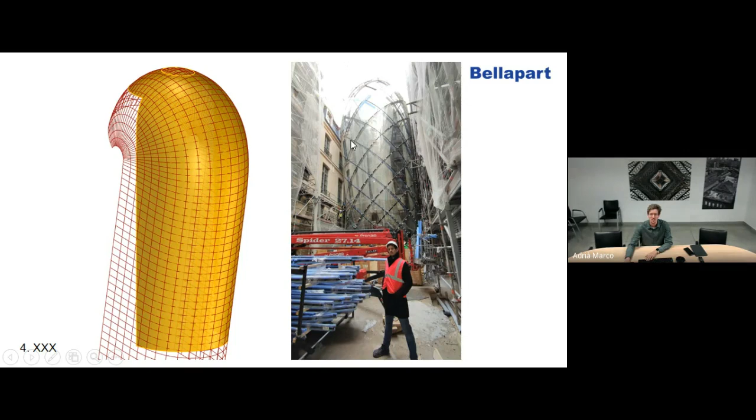And this is the catch against the existing building. The glass was heat-strengthened, not annealed, which is a new technique the glass suppliers developed. It was the first or second time they tried it, for this building, and it had a serigraphy pattern, and the structure goes like this with spirals that are not geodesic, so they have torsion. The structure was crazy.

We'll see some parts. This is the prototype we did to make sure what we were doing was fine. I'll try to explain. As you see here, this is a structure with three bent tubes with torsion — these plates with 3D bending and torsion that we found a supplier who could make. And then these bars are flat, from one node to another, joining all the spirals.

Here is our proposal. You see these spirals, the 3D spirals that went free inside the surface. So the consultant engineers tried to correct it, we said we had a better place, a better thing that was corrected, but making these joints where the joints are. So we had these nodes, 3D machined nodes on a 5-axis machine to join the 3 pieces, the flat and the curved one. And they said, okay, let's make one radius and simplify it.

And we were somehow like, we are too cool to simplify anything. We'll do exactly the geometry the architect wanted. And we worked on making the exact 3D shape the architect wanted in these spirals, this freeform double curvature shape.

So we had these tubes, here are planar, and I did a 3D model in Grasshopper to create all these nodes adapted to everywhere. So you see here the node, an easy one. When these bars are like this, the node, the solid one, gets higher when this angle is even bigger. The smallest one, I think, was 24 kilos. The biggest one was like 45 kilograms of steel, the final piece.

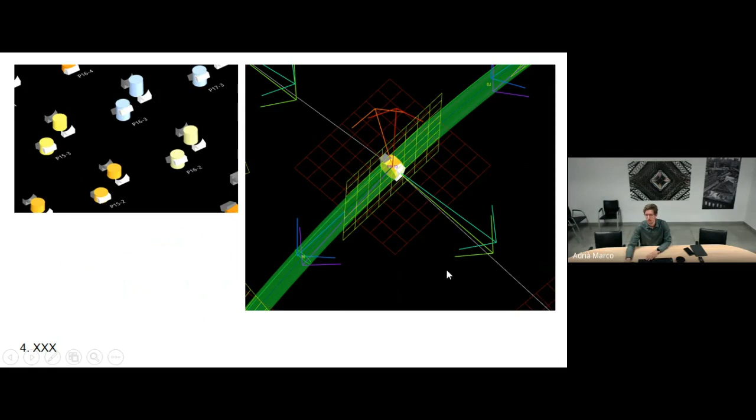Here you can see the node in red, how we connected to these tubes, and how these tubes had this small window, so you can put the hand and screw all the screws to the node. And here could be the flat ones.

You see here that every time this angle was different and this was different, and we have here a union point that was normal to the surface, and these bars with torsion where the glass was supported, symmetrically to each part. We had every bar supported to the node, the strong one, and then we had some points every, I think, 400 millimeters.

We had one support to the tube that were rotating inside the tube, because the tube was not geodesic, so the holes had to be normal to the surface, and they went randomly inside the tube.

So that was fun. Here are all the kinds of nodes. At the end, there were 188 different nodes. 144 were of this kind, which we called standard, because even though they kept growing, they were standard, every one of them.

This one here, these two, weighed like 150 kilos. And that was crazy. In the milling machine, we had to move it 5 times. It was crazy for the one who did the milling here.

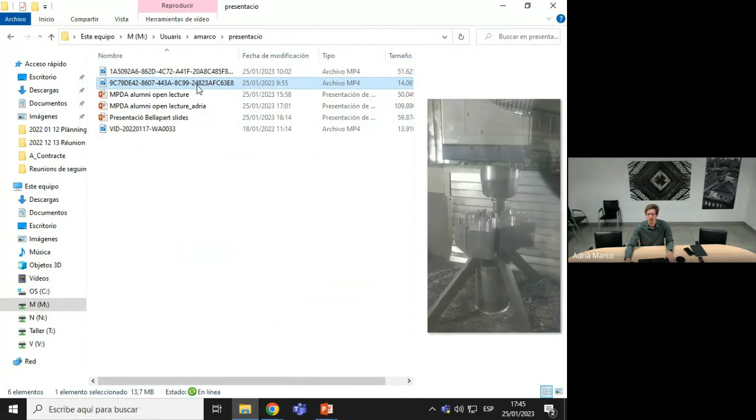I don't know if you will see this one. Let me see. It is the final touch. Well...

Okay, this is if you wanted to watch the milling machine, how it works. For example, this node was like, I think, 14 hours to make. So yeah, we were from June to October making nodes non-stop in the milling machine.

Okay, this was the tubes to make the structure. And here is the top part of the structure, how we assemble it, how we tested that everything fits, how we simulated the glass here with this waffle that I prepared to check that everything was fine and all the tolerances were okay. Having these 3D machined nodes was perfect because if they fit, they fit, and everything was perfect.

If not, welding it would have been crazy. But having milling machines at the millimeter and checking all of them, it made the job of assembling it very easy.

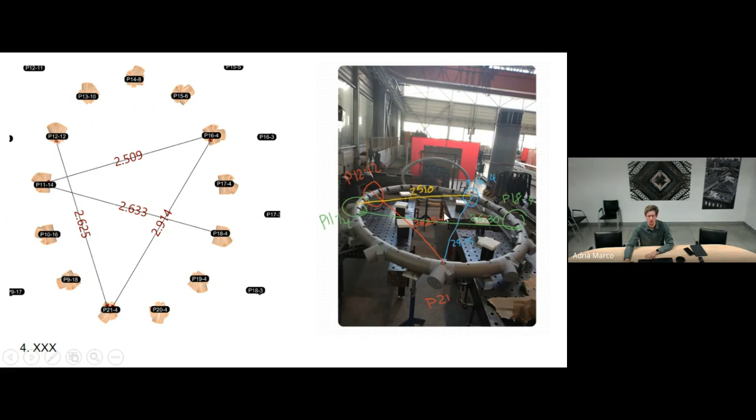Here we could check in the 3D model that everything was in place. We had these special nodes that had to adjust to someone's structure that was here, but we could just facilitate that it should be moved. I mean, the other structure could move in one way, this structure could move in another way.

So, how to put these rotating points, in which plane, in which axis should it rotate, how to have these planes. It was very fun to prepare this, because we had to coordinate with the 3D team here, who would send me things saying 'do as you can.' I had to prepare how to make this mesh with our structural engineers, to check that it made sense for them, both geometrically and otherwise.

And we can see here all the tubes, the spirals and the flat ones, and these connection nodes that I showed before. And this here, before they put the flat bars with torsion, there will be a detail in render. This goes to be welded, to be screwed, at these points. Something to optimize in Galapagos too.

Here will go the glass, and the glass had to have some screws. Here we don't have anything to put the screws, so we had to check which would be the perfect optimization to place all the screws while avoiding these holes here. So we had to check how to do that.

Here is the welding part. We tested one of the spirals, built it inside, and checked everything was perfect. With a laser scanner we checked all the tubes for any deformation, and we checked all the nodes with a laser scanner to see if there was something wrong with them. We confirmed every piece, except one tube, was perfect with just 0.2 millimeters of error, and that one spiral was good, so we said, okay, everything is good, let's go.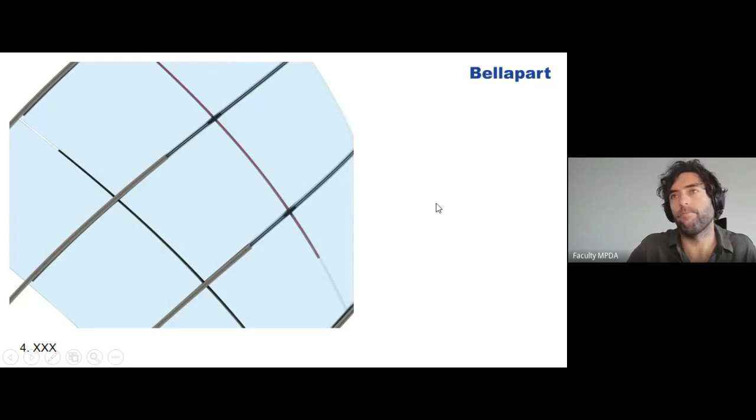Let's go. Here is a detail of how we finished the bottom of the building with this special node that we saw before, how it reached a planar space. And here's the upper part, how it fits with this corner, this node that is 50 millimeters, and this here that is like a cone, but an elliptical cone. It's very difficult to build.

It was not easy, we made it simple at the end and cheap, but when we asked some steel supplier, a bending supplier, how to bend this, they said it was overly expensive and that we would be scared of the price, so we went with someone else.

Here is the top of the building, how this sphere closes, and here there will be some windows. So the cables, there will be some cables that should go here, over here. And here's how we route the cables, with this other tube that goes alongside this big tube, and between the tube and this planar piece, this planar piece with torsion plate.

And geometrically, it's so fun and really amazing how to create all of this. Here is how the tubes, the cables arrive here, go to this channel, and can open all these windows and the lights. Here are the windows. And how the water will go from here into the channel and out.

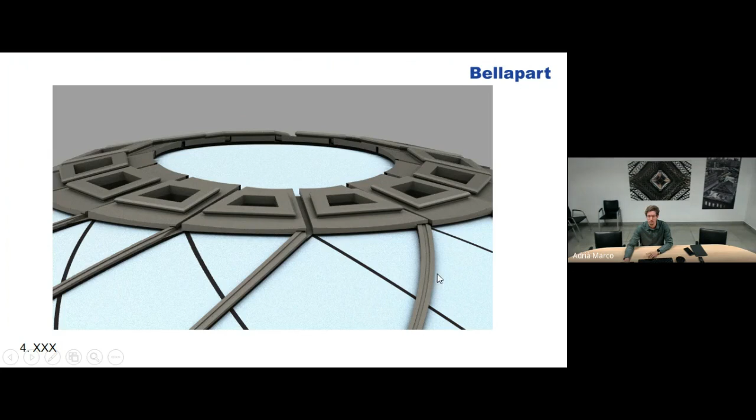And well, this is a cool part, this is the serigraphy. They wanted the building to have a fritting pattern.

Okay, now we know it's in France. Yeah, or Monaco or Luxembourg. Yeah, Belgium or Canada. And we can go from 10% to 100% of serigraphy, and they supplied us a pattern. I said, this pattern is very difficult. I said, you know Grasshopper, you should know how to do it. I said, yes, do it yourself if it's your job.

And they said, no, Grasshopper, you do it. And at the end, I had to create this pattern somehow. Come on, it's nice, it's a nice job. Yeah, if we did it with Python, I will.

This was done with Ladybug, analyzing all the radiation on all the surfaces. The yellow part with more radiation needed more fritting, less fritting, and the black part is zero fritting because it has no radiation.

But this is architecture, not science. So the architect Adrià said, let's make it symmetrical, even though the graphic isn't symmetrical. We prepared these lines, drawing handmade, more or less like this.

This is a 10% line, 20% line, 30%, 45%, all here. So how do you create a pattern that goes from 10% to 45% inside this double curvature shape? Here is what I invented.

It's done with Python. I input some numbers here, 35, 40, 20, 20. The corners I knew, which should be the 100% of the pattern. Then I created this curve of how the grading should be, linear, curved, or exponential.

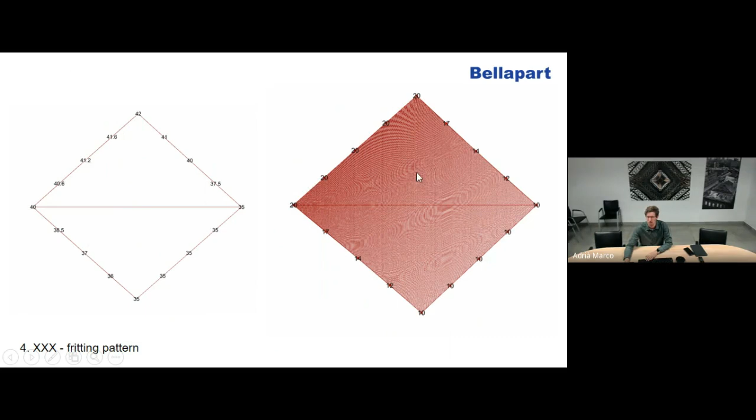These points in the middle know where they should go, and you have millions of points in every glass panel. You see here the gradient, from 10 to 20%, imagine 45%, and every panel is different. This job without Python or Grasshopper would be crazy, I think impossible to draw so many points. But it was really fun.

Stressful and fun. Here are some details of the building. Here's when we started assembling. We had to make this zone, then this zone, then this zone, because it has to hold itself when we install it. And well, everything was perfect, but at the end you have to make one spiral.

We did assemble the nodes at the end. They pulled it backwards, then fit it all together and put it back in its place. Build this spiral, disassemble the borders, the edges, pull it back, prepare it, and boom, make some force. When they are all settled, then put some screws.

So it was difficult to build. Even though it was perfect, everything was perfect, it was difficult to install it.

And here, that render we saw before, here they are installing the pladur. Here is a node that you can barely see. Well, you have the joints, but it fits perfectly and everything. You don't see here the big one that holds the torsion plate.

And here is the image from before, that 150 node, that render from before, that everything fits. It's here, yeah.

And you can see the pattern of the serigraphy. Even though it's 45%, it's full of dots. You can see what's behind it, and yeah.

And here it's me checking that everything was okay on site. Like okay, and well, it's just some part. Oh, you can see here the cover for this hole, so it doesn't have this hole.

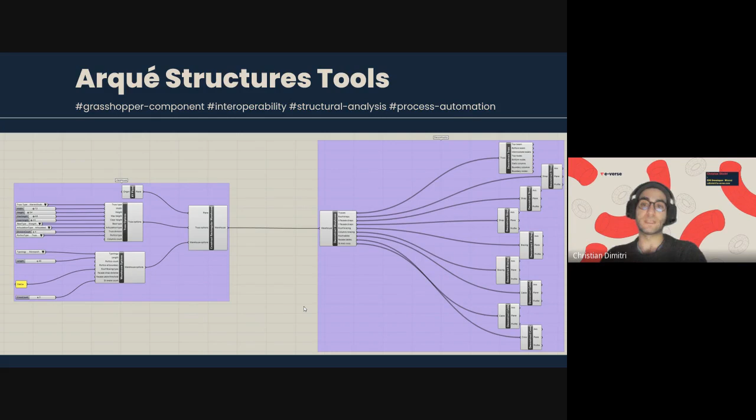The idea was to do a process automation from the pre-design phase, doing simple and quick proposals by having a set of inputs, a simple method, and exporting the geometrical objects independently. The outcome helped the engineers of the company set up the Karamba definitions by setting some load cases related to the Eurocode, and everything related to geometry I was the one to modulate.

Moreover, from this library, we worked on how to unroll panels that cover freeform bridges that come from Tekla structures. Tekla structures is a really powerful tool for BIM modeling, execution, and so on. But as the mesh they have has a thickness, and Tekla doesn't have a plugin to unroll meshes, it has a method to unroll ruled surfaces like Grasshopper.

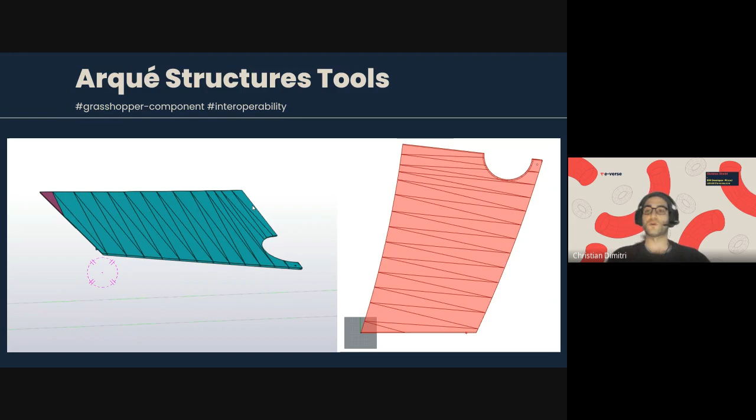Okay, so in the meantime, I was also managing my time to create a marketing plan, a marketing objective for the company, which is a parametric user interface in a cloud computing, cloud-based application.

It's cloud computing using Shapediver, which is a plugin inside Grasshopper. If you connect your outputs into the geometry loader of Shapediver and upload your definition following the restrictions of third-party plugins compatible with Shapediver, you can have an online configurator. This is good for people who want to create online e-commerce platforms to sell parametric furniture, like Tylko or so on.

Here we created our spatial frames prototype as an online configurator. This version was actually an integration between Shapediver and Vue.js, a framework that combines HTML, JavaScript, and CSS, and is easy to use.

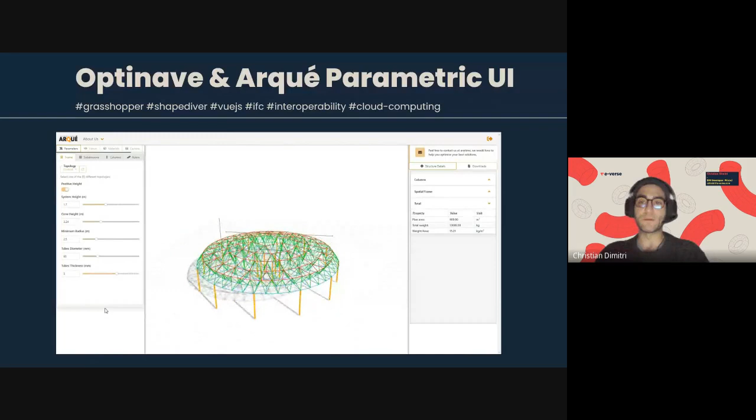Basically, we designed our own user interface. On the left are the geometrical properties of the frame, and on the right is a table with the details of the spatial frame.

And of course, there are downloads for interoperability. So at the end, the architect or contractor using this can download any type of file they want, from IFC to STL to DWG.

I can show you here. This was actually to call our clients to use and try our platform, but at the same time, this is not buildable. We do that so they contact us and we calculate the inputs they used using our system in Karamba internally. We did the update with Construsoft, and we call it Optinave.

Indeed, it does use Karamba, and the platform is online right now. You can go use it. It uses the Eurocode and the United States code. I'm sorry, it is in Spanish at the moment. We are planning to implement the i18n library to be able to do quick translation.

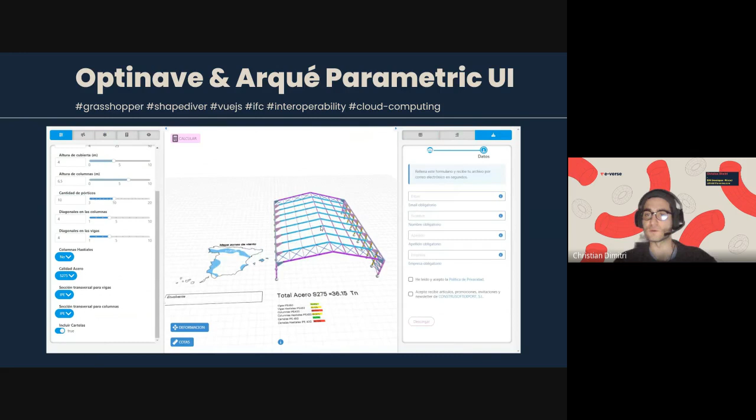And indeed, here the system does optimize using real values and real rules. This is showing how they are interoperating between Tekla and Trimble Connect and so on.

One real project that has been executed, I'll go very quick, is a tunnel here in Spain. It was a competition, I don't know if the company won it. It was a set of candidates trying to solve the problem of fog on a highway in the north of Spain that is causing a lot of accidents.

So our company offered to build a tunnel with a spatial frame that would contain sprayers of something like water, but it won't be water. It's some kind of chemical, or I don't know what it is exactly, to be able to let the fog fall down.

So for the assembly, they split it in two ways because the pillars are really thin. They had to raise the corners, the sides, and assemble them from the center.

So at the moment, I am really happy with where I'm working. I am learning a lot of tools, how to develop software solutions for our community, from Autodesk to Rhino to whatever our clients ask. Our goal is to change the industry and help our clients automate their processes.

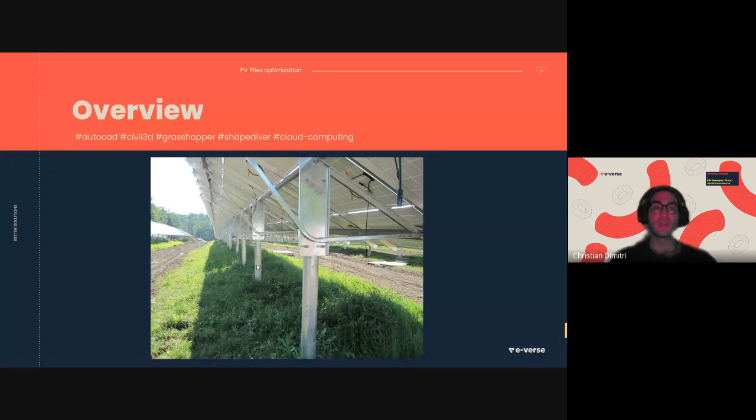I don't know if you guys know what a solar panel field is. It's a set of trackers supported by piles, and each tracker contains a set of panel fields, photovoltaic panels. Each pile has a minimum and maximum height it can open to, and the task is to optimize the quantity of metal material spent on the project, along with a set of behavior constraints.

So initially, they start in the XY plane at zero height, and they have the surface of the topography at the real altitude height. So they do a projection, and then they specify the maximum slope that a tracker can have.

Okay, so they raise their piles and measure if their piles fall inside the interval between the minimum and maximum, and they do some mathematical operation. They find if there is a maximum difference, a minimum difference, or both at the same time, and in each case a mathematical function is applied. The piles that can't be fixed mathematically by raising or lowering the tracker require a material grading to be made.

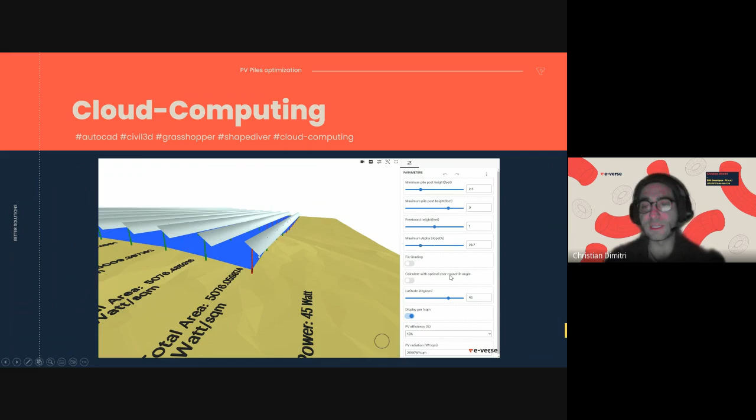And this is the actual user interface that we created with ShapeDiver. It contains the inputs where constraints have to be set. The maximum alpha slope is how much the panel can tilt. Fixing grading is going to be shown right now.

The blue surface is the flood depth. So the panels always have to be above the freeboard height, which is 1 meter. This is measured on the lowest pile, and if the lowest pile doesn't match this condition, the pile has to be raised.

Since this is now a mock-up, we adapted a generic calculation for how many kilowatts we can extract from this panel field, because we don't know what type of machines, like inverters and batteries and so on, will be used. So we just adapted generic inputs, which are standard numbers in the market. If you see here, the red piles after the calculation are the piles that need to have earth below them.

One of the other projects I'm participating in is visualizing data with IoT and Amazon Web Services using Forge and SCADA. It's a mock-up. IoT, for those who don't know, is Internet of Things and data visualization. It helps us better understand our data, visualize it, analyze it, as it comes from different data streams.

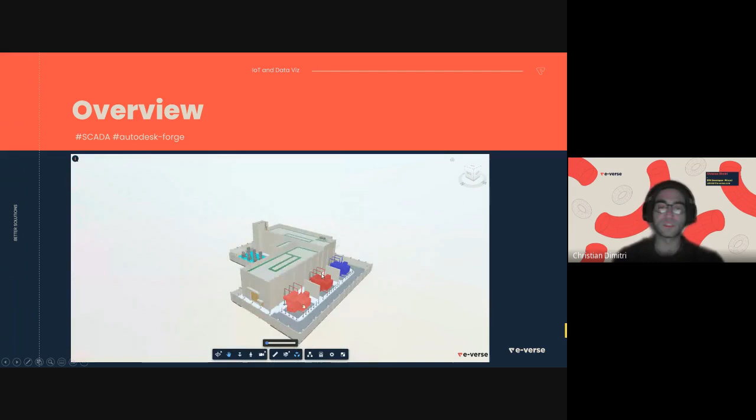So this is one mock-up I'm showing right now, how we can control our motors from wherever we are, just by having one sensor and a digital twin. We can do this not only with motors - it's a really simple example right now, but it can be done with anything.

Okay, so here I wanted to show a quick sample because I couldn't extract a GIF. Our Forge viewer also serves to explode the model, observe it, and measure it. So here you can have the layer of the IFC element.

You can see them by type. You can do a cross section on the model and observe the elements, and you can also see the project properties.

Okay, so I'll jump to the next project quickly.

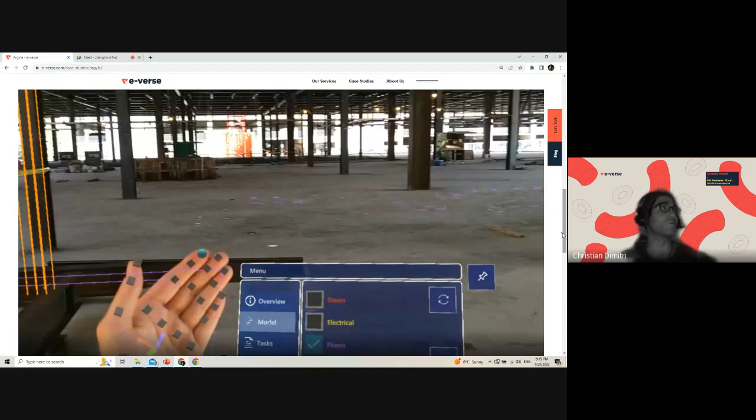Argyle is not a project that I participated in, but it's a cool project I would like to show you. It's one of our clients, and they are BIM freaks. They want to make the construction field on site like Iron Man, like Tony Stark.

So I'm going to show you a video. Our role here was to help them create an exporter, a special exporter from Navisworks and Revit that can be compatible with showing and helping the co-workers on site using augmented reality on the HoloLens 2. So I'm going to show you a cool video right now.

This helps us on site, of course, to achieve better precision.